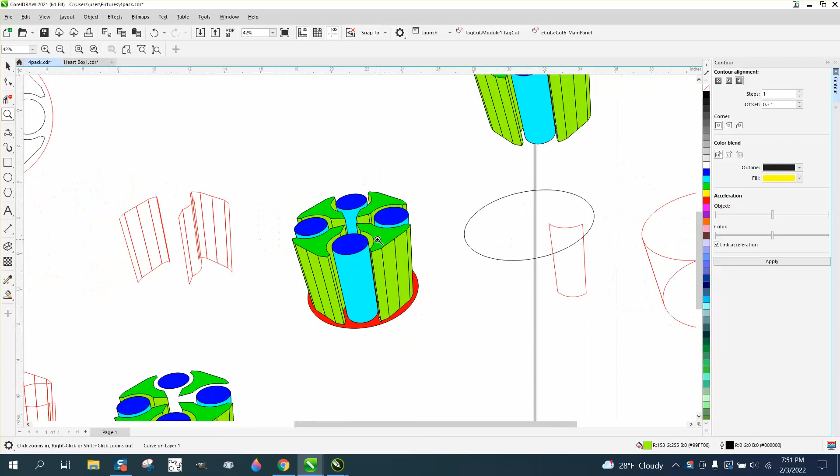Once you've gone to this point, I would have finished the whole thing out before I smart filled it. But once you've gone to this point, there might be an advantage to having the smart fill there. Like if we move that over there, the lines of our next smart fill are there, or what we need to fill in, but I don't have to delete anything because they're behind the smart fill.

Let's see if we can't move a few more. I'm going to try to make this a little short and sweet. Let's try that line. See, that's completely gone. I'm just going to delete it. That line goes there. That line goes there, that's needed. And that line goes there. And that's really about it, I think.

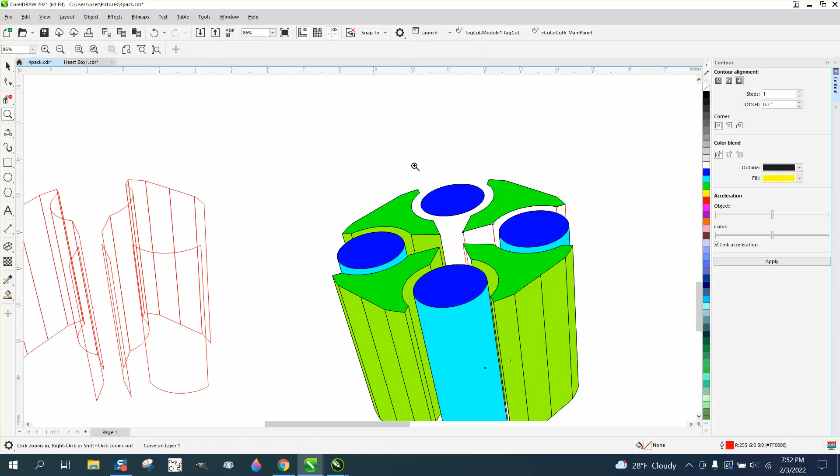See, the lines that I moved, I don't have to cut them off. They're just covered. I think I need two more lines up in here. And then we'll just finish this puppy off. See, there you go, we needed that.

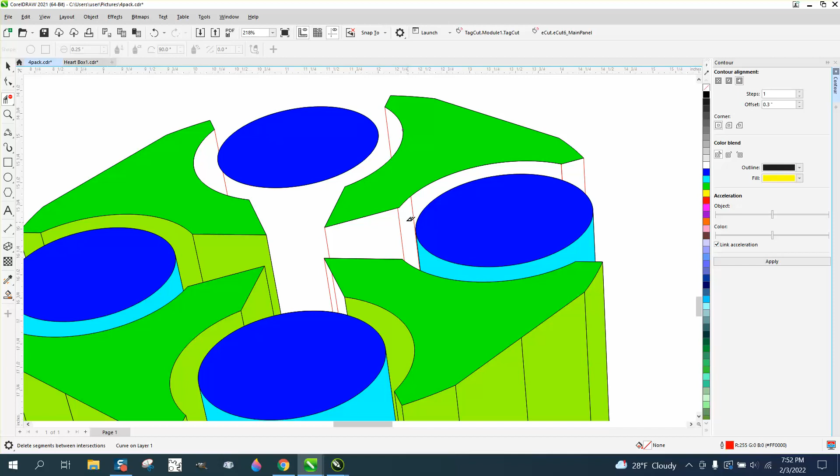We need a line over here, and it should be just one of these. There we go. Now I don't have to delete any lines. Now there's a double line there I don't like. I don't understand what that is, but delete one of them. And then I'm just going to use the same color plan. I've got that green, I'm going to fill that in.

Now, if you notice that the black lines aren't showing up - and you know, there's two lines there and probably only going to need to be one. But see, it's a lot less deleting. A lot less. Now we'll grab the whole thing and make the lines black.

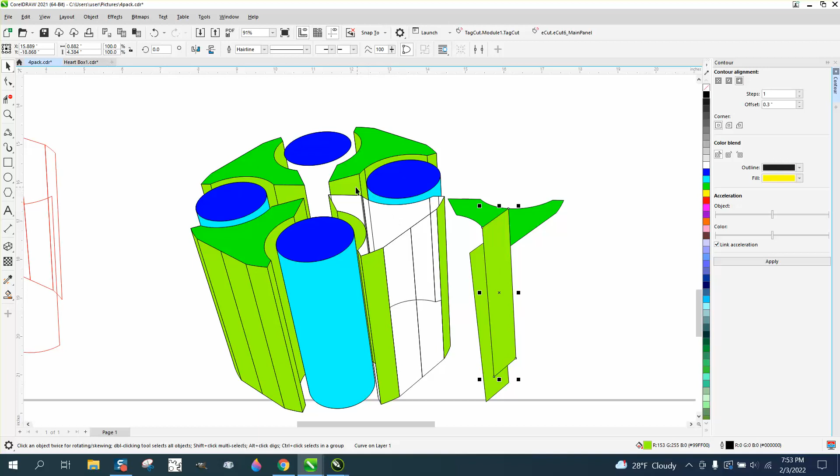And the other lines, it's just the black lines are filling in the smart fill. There's still some red lines behind there, I promise you. Look at the lines I didn't have to delete because I turned them all black, but they're behind the smart fill. So it's going to save you a lot of cutting time.

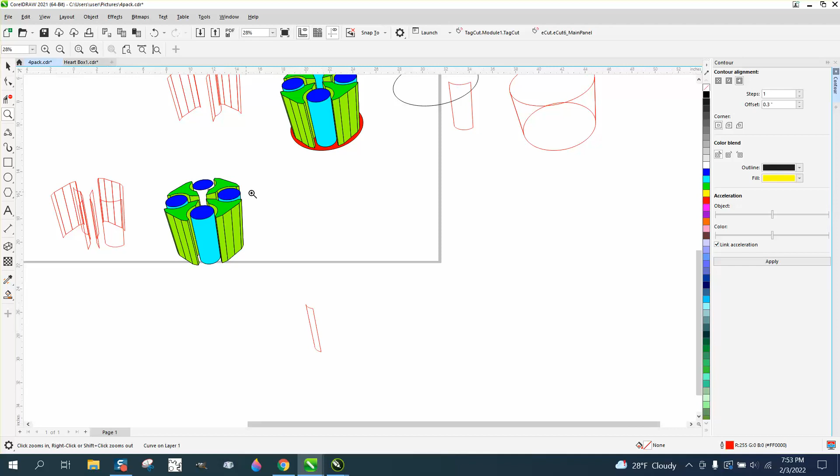I need one more line for the - you know, I might have messed up because I need one more line for the back circular part. I made a copy, but I didn't move it over. It's probably right here. See if I got lucky. Nope. But you're getting what I'm saying, I hope.

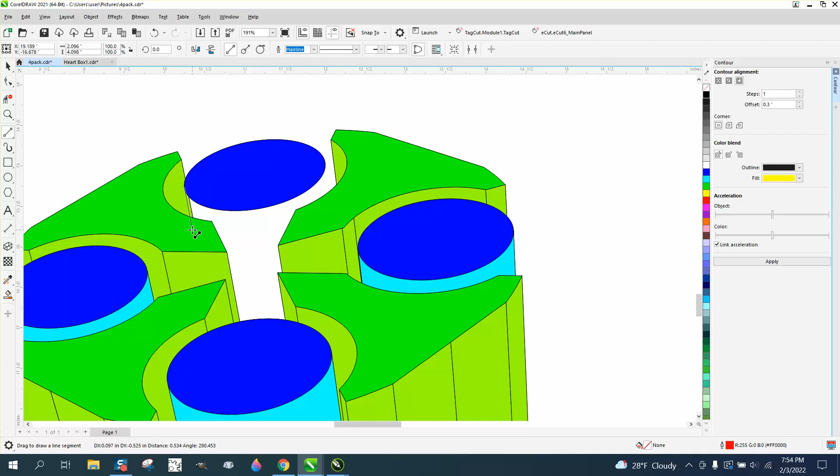And then you could fill this in with old school, like we did on the very first video - just take a 2-point line and go from there to there, there to about there. And then you could fill that in with the cylinder color, which is the blue.

Now see, those red lines are still there, so I have to delete them. And I think if I delete them, I'm going to know it worked. So I think I actually deleted the wrong line. But what I'm saying is you don't have to delete the line.

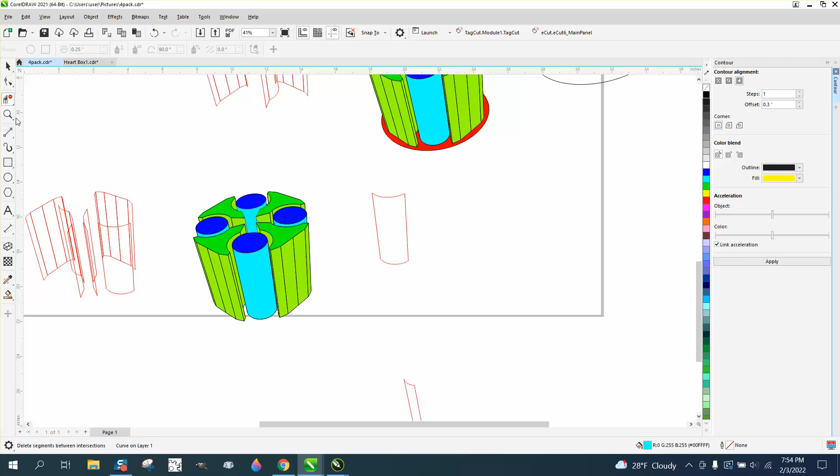Let's just make an example. Let's take a smart fill and put it in here, and just move this line over there. And see, you can't see it because the smart fill's on top. Now you could put them on top - you could go to object, order, front of page, and you can see it, but the smart fill evidently is on top.

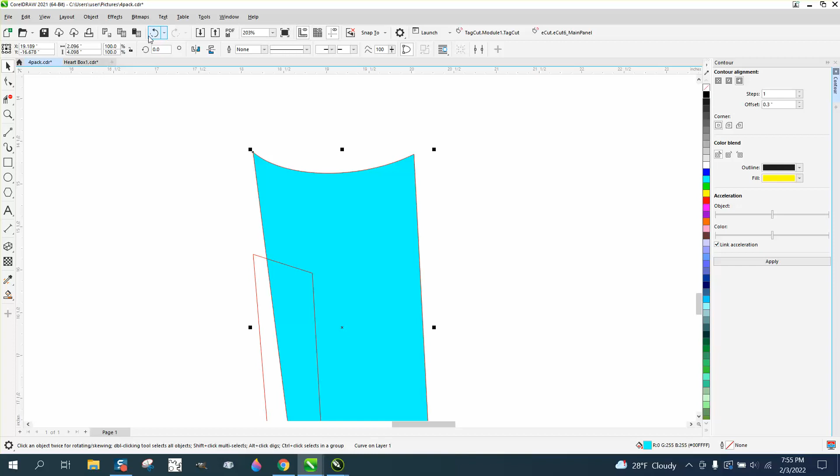That's pretty cool. The only other thing I would like to play around with, and I promise I'm not going to make a video, is do some shading to make the interior parts a little darker. But anyway, I hope that helped just a little bit. Thank you.